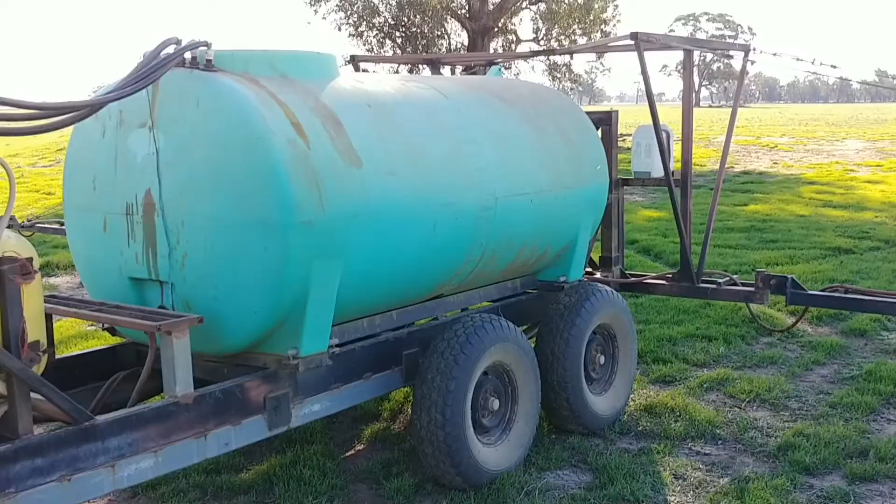It's got a 3,000 litre tank, 18 metre boom, 17.5, 18 metres.

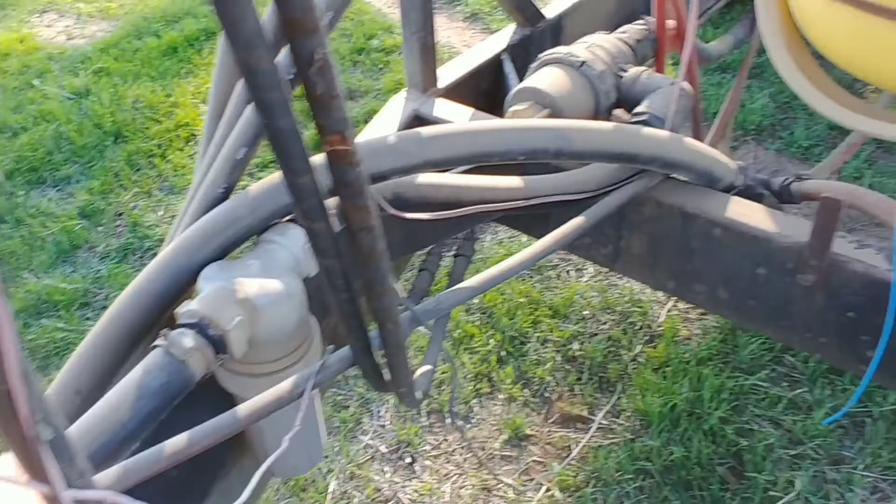Start from the pump, I guess. It's got this diaphragm pump, on the PTO. Water in, a couple of filters, water comes in. This is some type of pressure relief return line back to the tank.

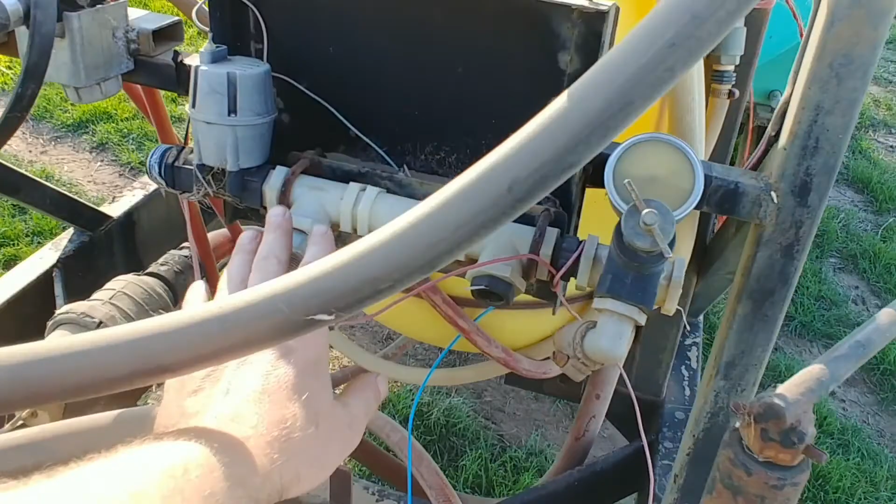The old control system was here, which we're not using anymore. I'll get to the new one in a minute. It's a bit past it, out in the weather for a long time. I think this is the old foam tank or something, which we're not using.

We use GPS these days. The tank itself is pretty good. Lid works, which is nice. 3,000 litres, looked really strong.

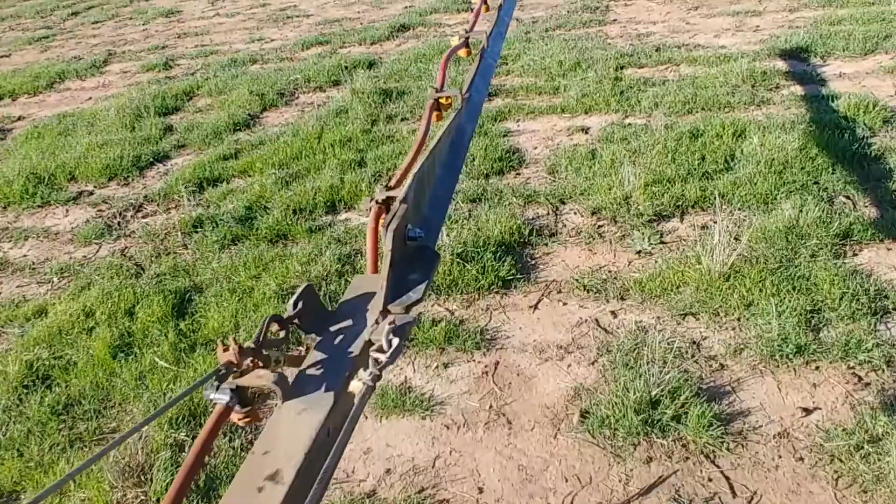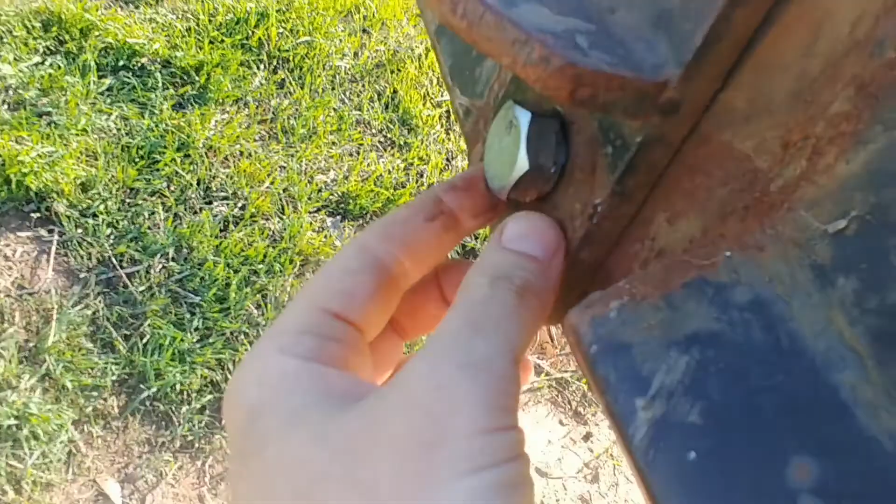The boom just folds out. Gotta do this bolt up, because if you don't do it up, you'll lose it, and then this will flop around, and then this bolt will shear off, and you'll lose this part of the boom. That happened to me this morning. But got this bolt in here now, done it real tight. So hopefully that doesn't happen again.

So it's got 3 sections. That long section, small section in the back, and another long section here. This boom's the same.

It's using the TeeJet nozzles, LA ones. These wheels are apparently pretty good, they seem good. Haven't failed on me yet, which is nice.

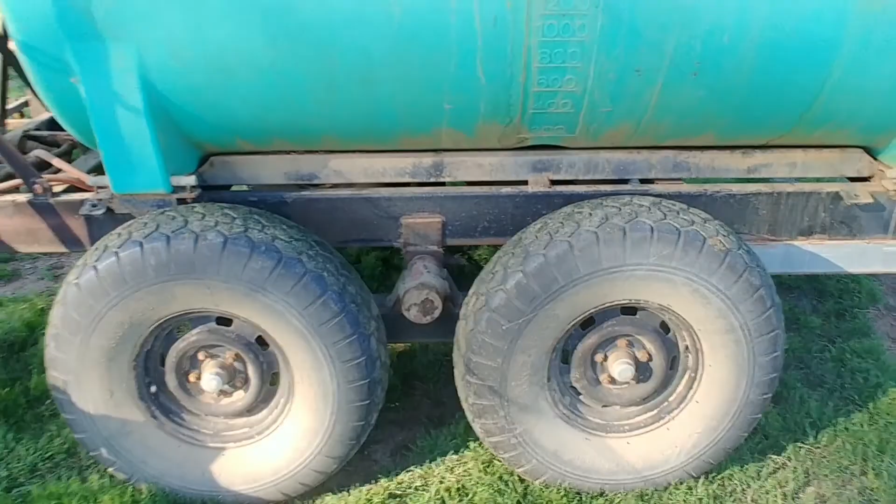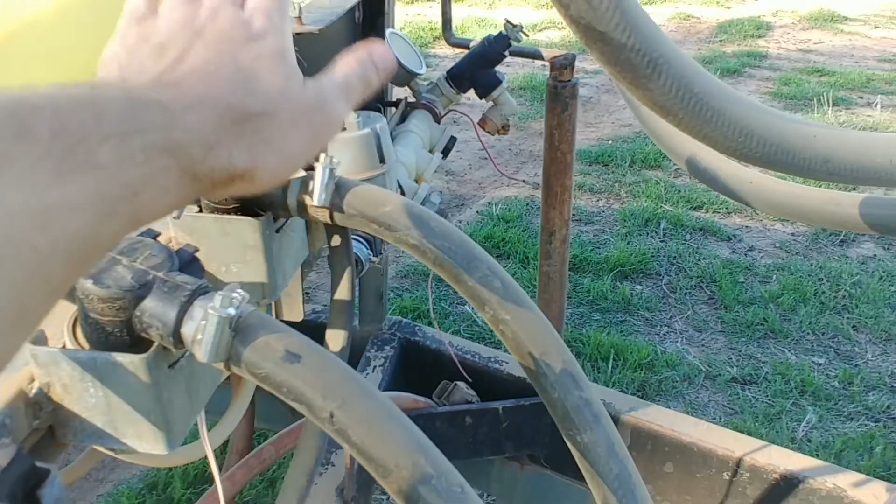So the main thing we did, we've got these boom lines, 3 boom lines coming out of the control system. And we put filters on these so we can clean these filters, get any sand out.

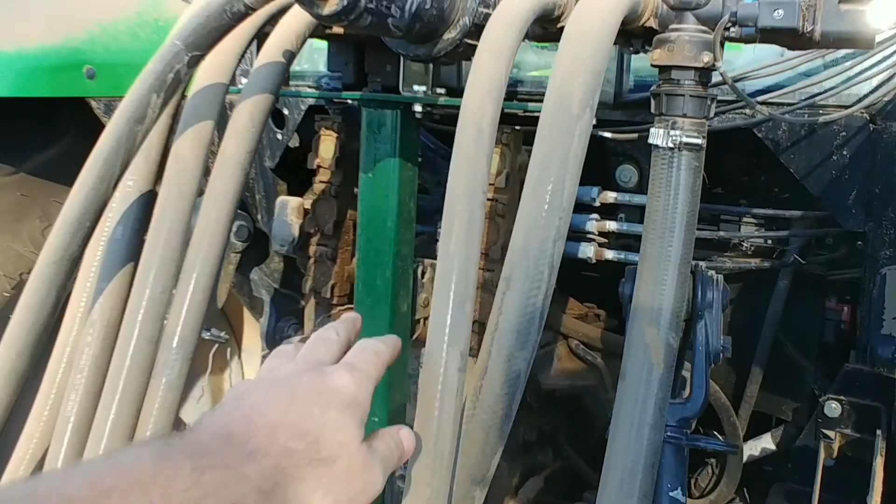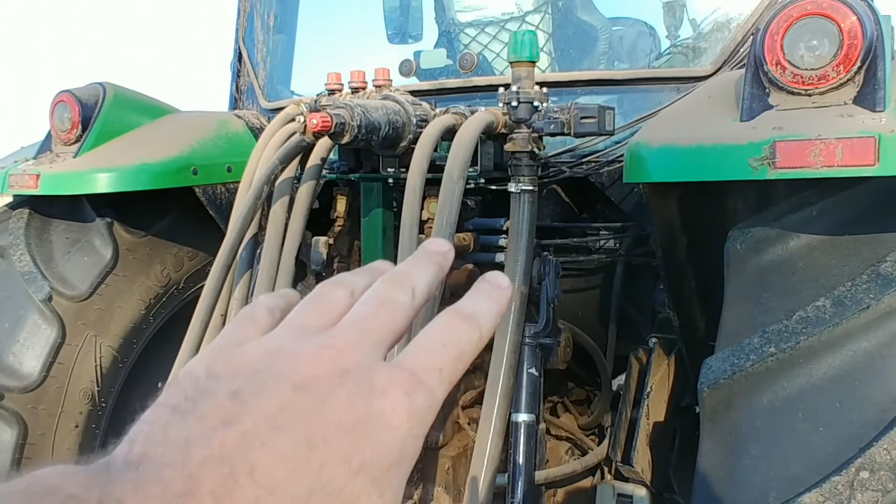So the main upgrade we did to this spray cart is we added a new control system. I've mounted it up here on the back of the tractor, which is probably not the best idea. You probably should have it down here, and all your hoses can be shorter, especially since it's electronically controlled. But maybe that'll be something we change in the future. Got all these hoses sort of hanging, but it does work all right up here.

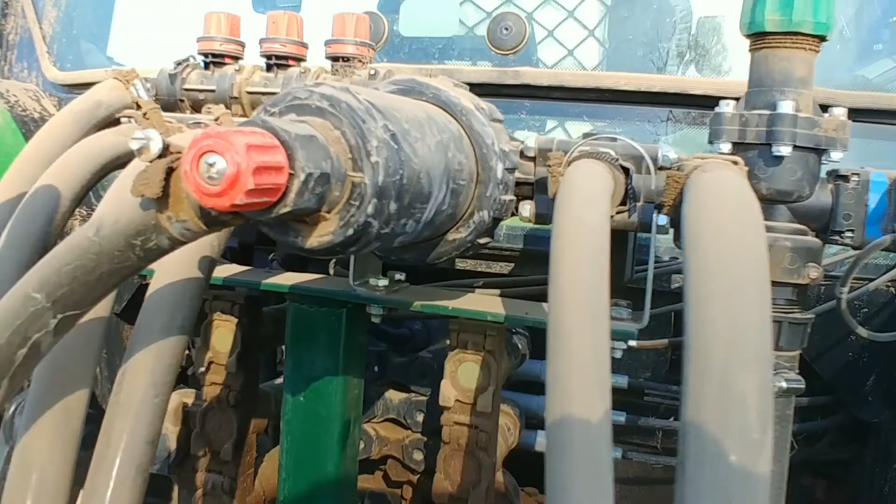I wanted it up here so I could see the pressure gauge, and if I had to, I could mess with these settings, or this one. But it seems that, after using it, you may as well mount it down here.

So this is the main water in here from the pump. Main water comes in. This is the maximum pressure valve, return line. Proportional valve with the return, filter with the return, the 3 booms, and the return. Extra pressure from the booms, I guess.

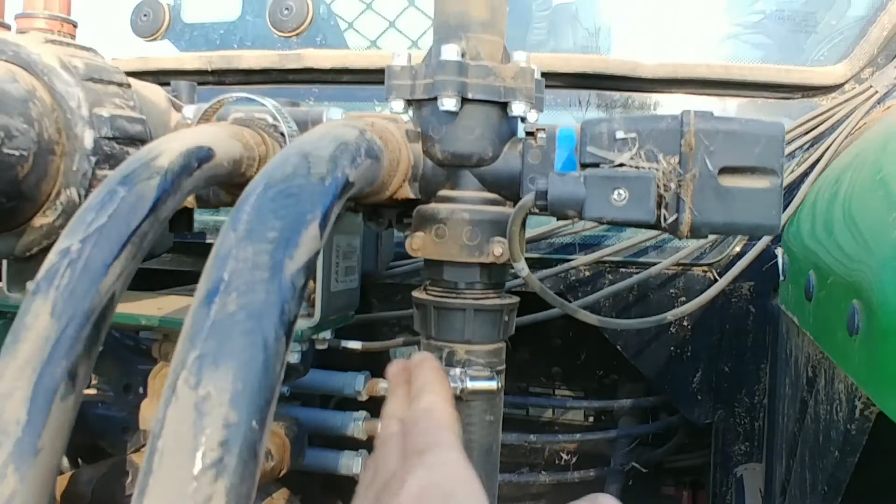So it's got this main gear motor. If you turn this on, it lets water through the system. If you turn it off, it just all recirculates back through this valve here. And then depending on where this is set, any extra pressure comes back through here too, which is nice.

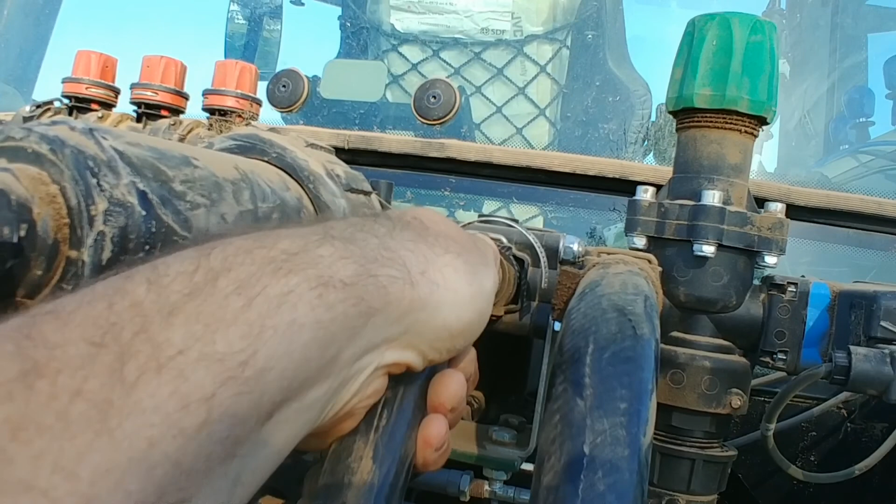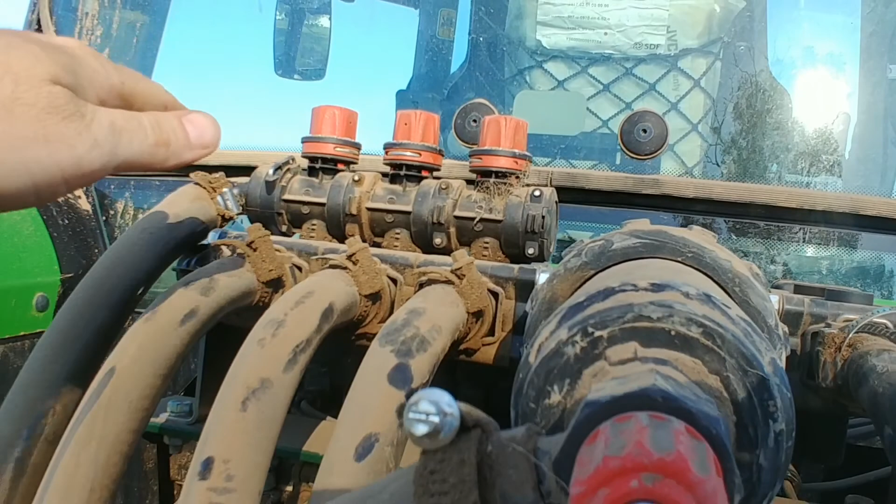And then you set your actual pressure with the proportional valve, and then you just got to set these cocks so all the pressure, depending on whether each section is off or on, 1, 2, 3, it equalizes the pressure. So you can turn a section off and everything's spraying at the same rate.

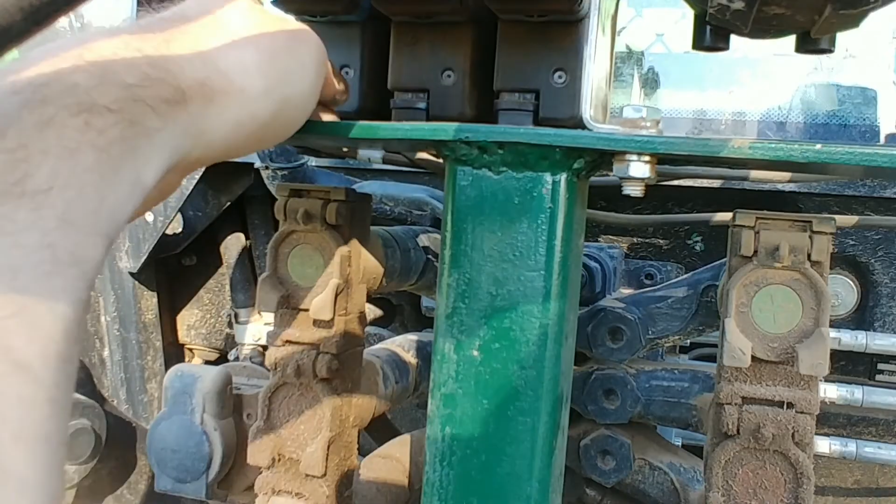And this is an ARAG system. Got it from sprayshop.com.au, 1,900 bucks. And you can see there's electronic control. I don't think they're solenoid, I think it's some sort of mechanical control, I'm not entirely sure.

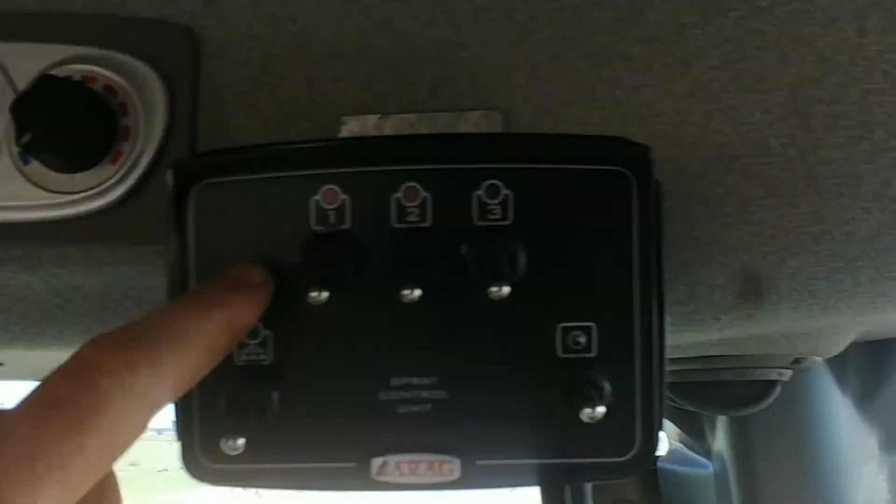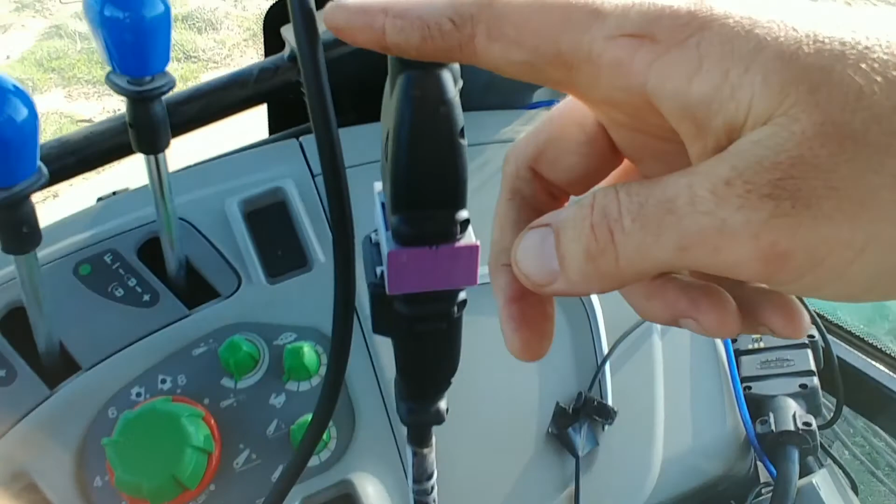But that goes up into the control box, which I'll show you. Now this is a series 4669 ARAG control box, which you just plug into power. We just got a 12 volt socket down here, and then it's got all 5 of those mechanical valves or whatever come out through this control line.

So from up here I can see the pressure gauge, which is nice. I can feel all the valves moving. But as I said, we'll probably move it down there at some point.

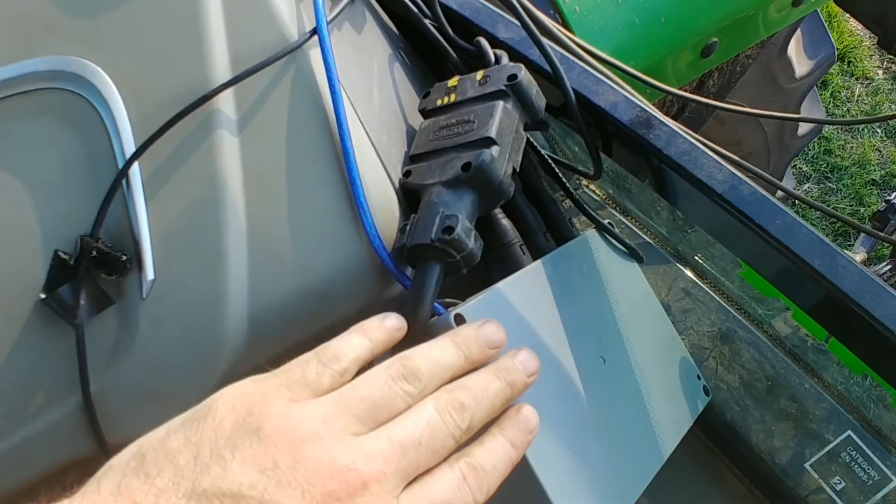Okay, so what I've done here is I've spliced into this control line, and I've got all 3 of the section valves going into a box which has a little Arduino and a relay, or 4-channel relay, using 3 of them. And that's controlled by, connected through USB back to this computer, which is running AgOpenGPS. And it just controls those relays for you, which is sweet.

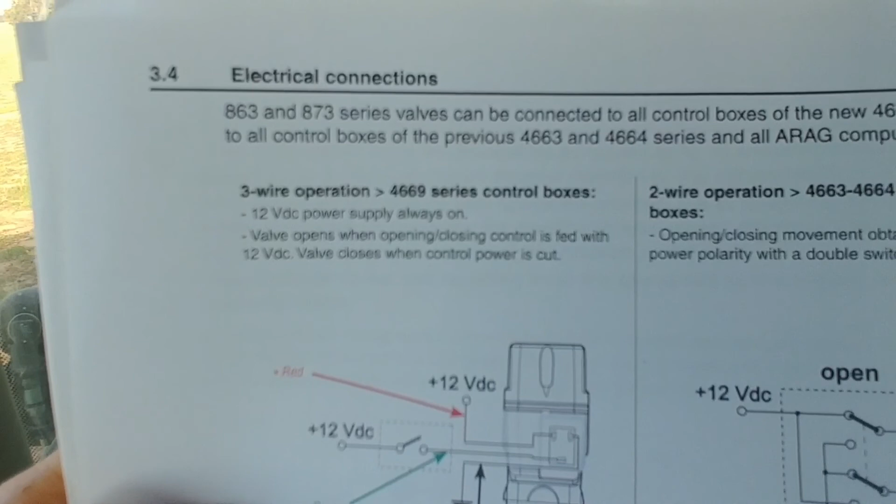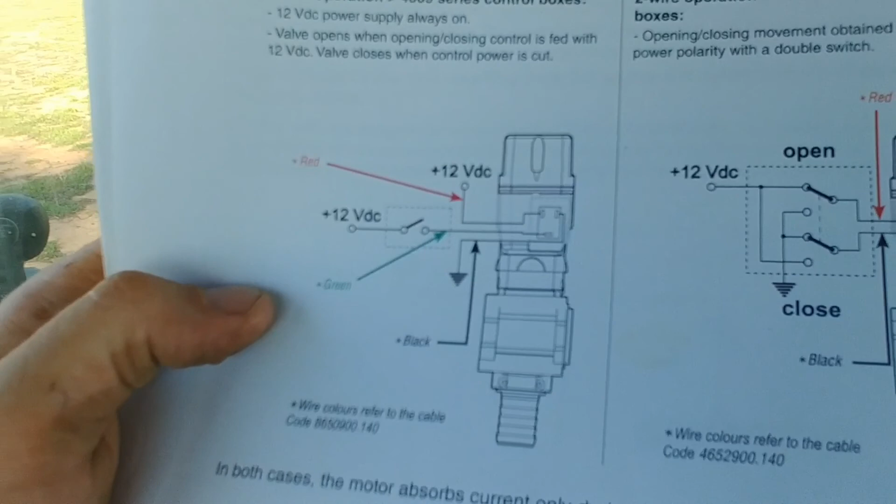And it's quite good because if you look at the book for this 4669 series control box, it says here, valve opens when opening, closing control is fed with 12 volt. Valve closes when power is cut. So for each electric valve, there's a positive signal in green and a black, so earth or whatever. And all you have to do is cut the power to the green, to the signal one. So I wired through the signal through to this box to a normally closed relay.

So that works really well.

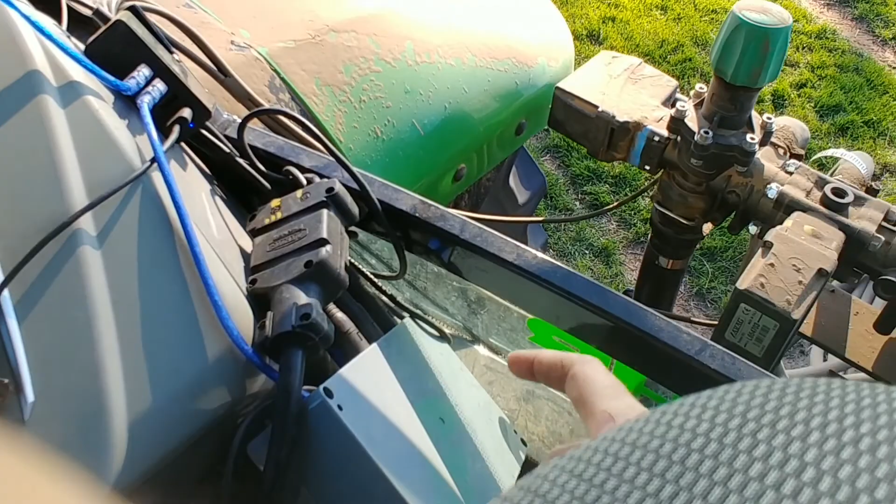Yeah, so you can still control all the valves with 1, 2, 3. Trust me, it works. It'll be closed because of that relay. But then, even if these are on, the control box will close the relay when the computer tells it.

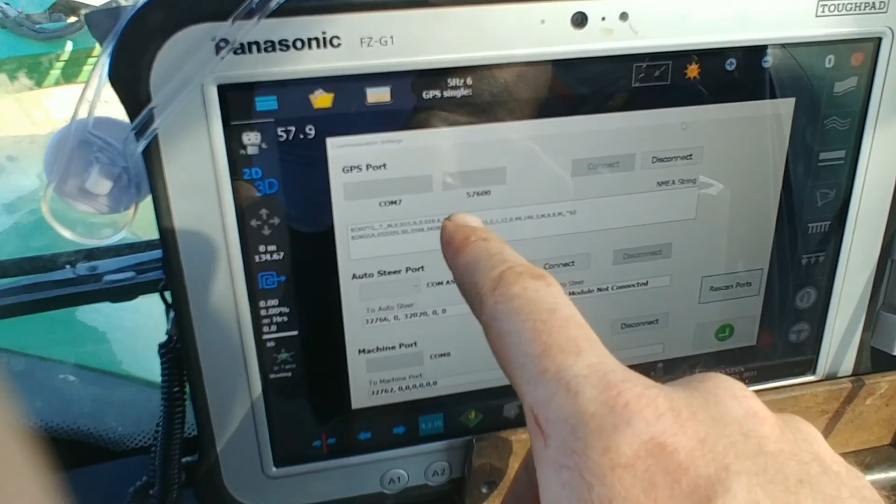So that works really nice. Then we've got AgOpenGPS here. Oh, now everything's turning on. And we can see down here, serial port, so we've got GPS coming through here, and the machine port is that relay box.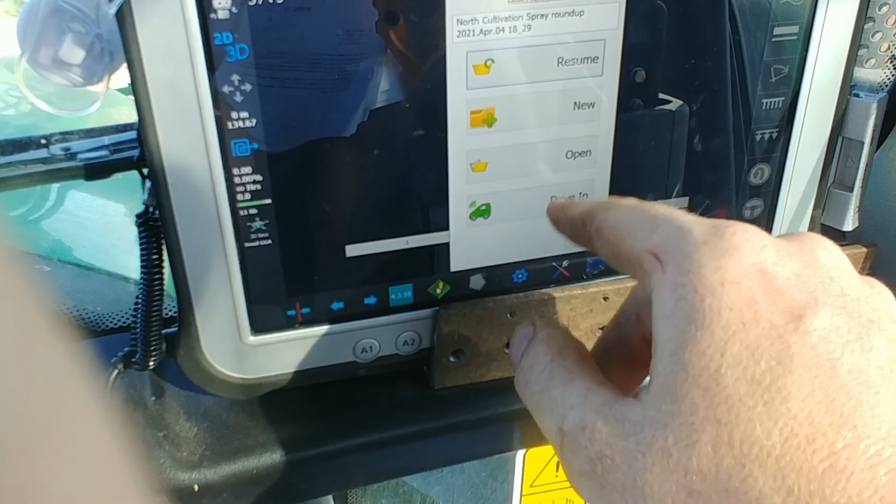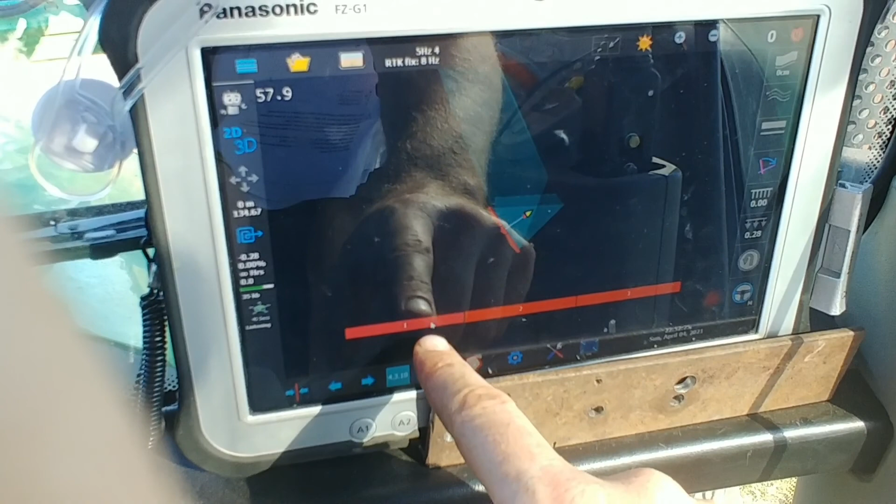So we can just say, open a test field. You can hear, so yeah, see, we can control the relays with this. So if I turn this on, but I turn it off here, that'll override it. So it's cool, you have to have all these on, but then the computer controls the relays.

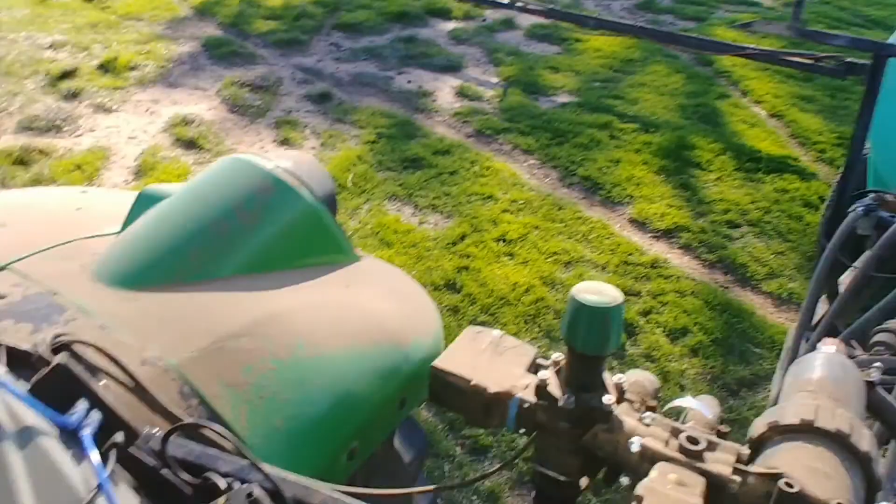Okay, just gonna give a quick demo of how to use AgOpenGPS. First thing you want to do is turn on the pump, so turn the PTO on. See the shaft is spinning down there.

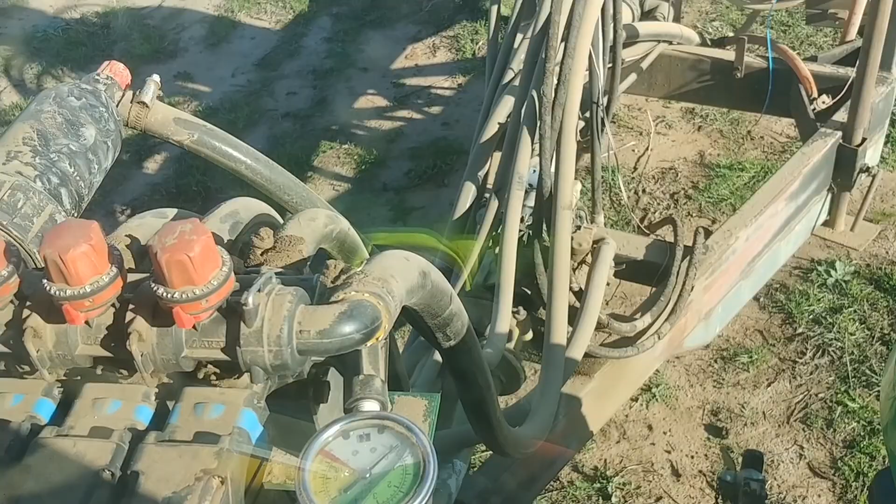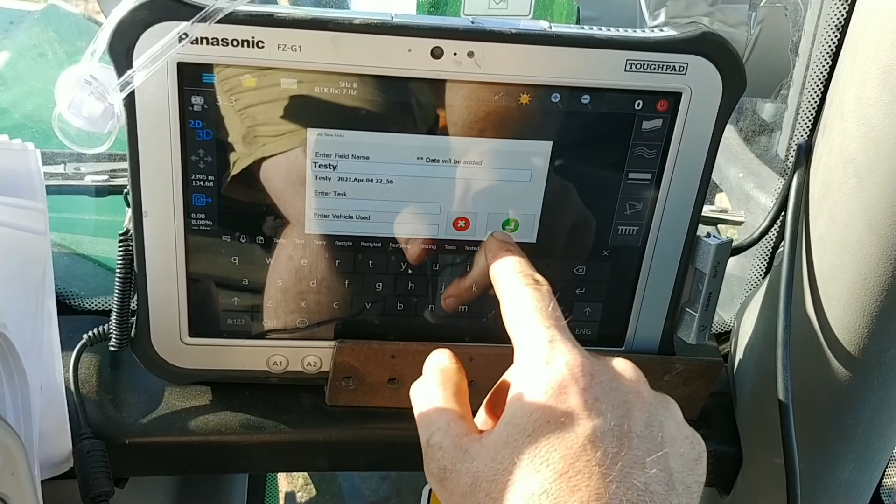We set up the computer, we'll say new, put a field in. Testy. Okay, first thing you want to do is make a boundary then, and you can see your 8.66 is, you know, half of your tool width over to the side.

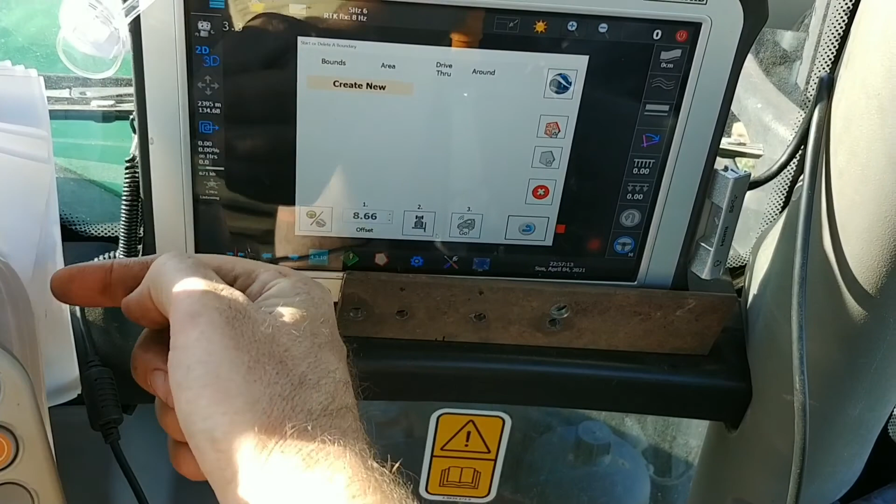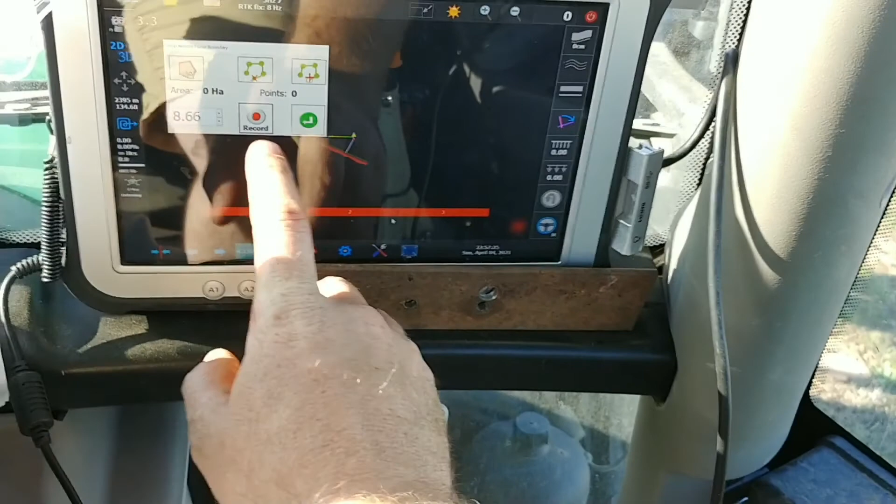So you press create new, and you want to make a boundary on the left hand side, for example, and you just press go, and then you can just press record now. And normally you would turn on that one when you're ready to go. But anyway, we've got our pump going, so now we've got to turn our control box on.

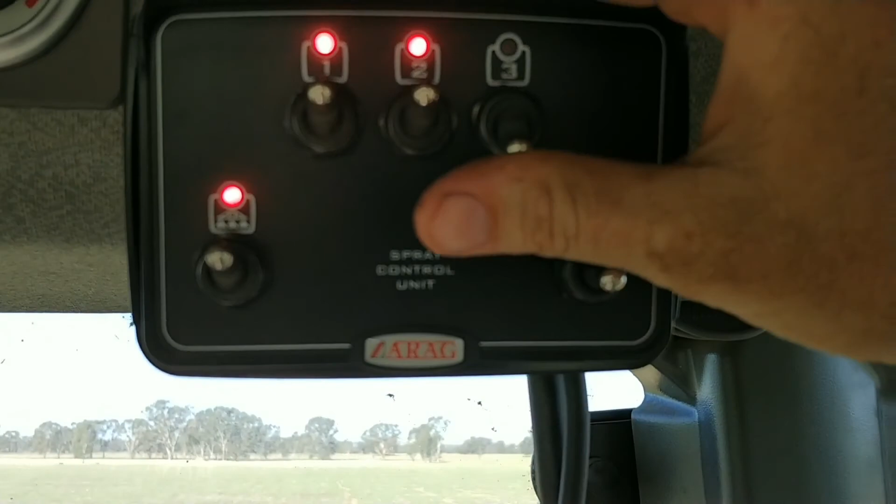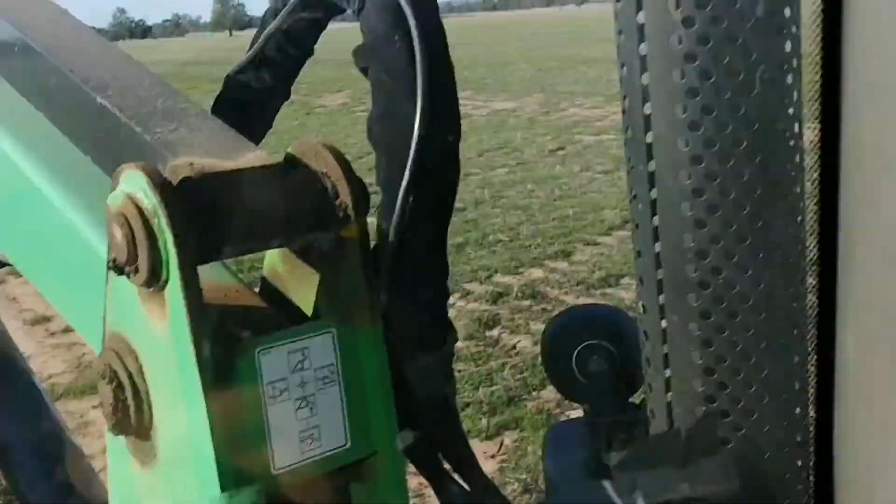And all our sections on the control box. And if I were to press, say, section 3, turn on here, third section will start spraying. So normally when you first go around the paddock, you'd actually put the automatic one on, and it'll turn them all on, and they'll all be spraying.

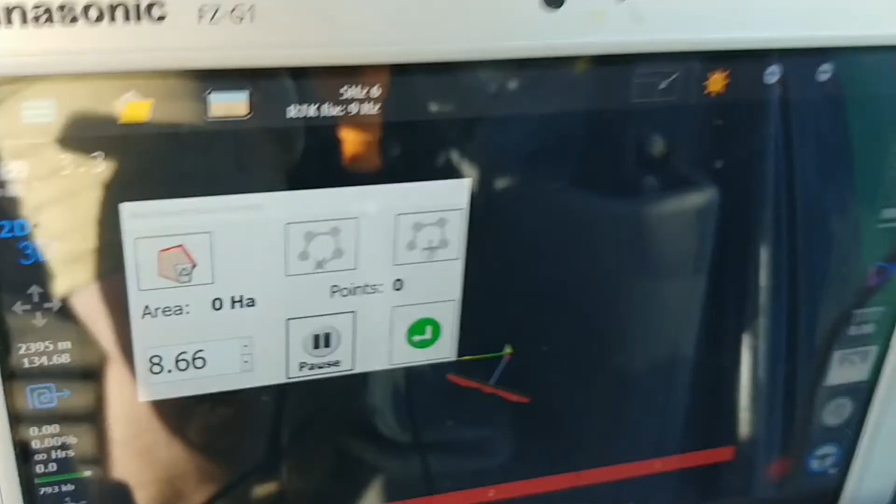But this is just an example, so I won't actually press that button, I'll just show you how to create a boundary and an AB line. So anyway, we hit record, we'll get our pump up to the RPM we want. We've got our control box on. We check the pressure, make sure we got the right pressure.

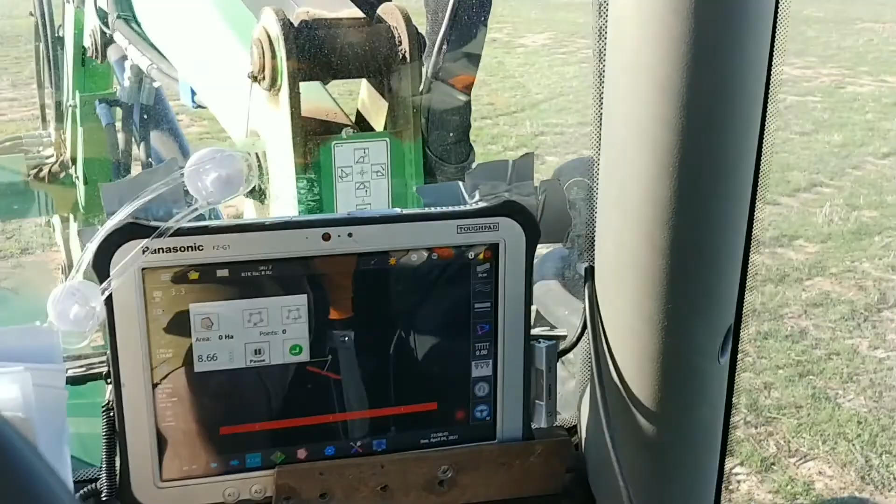Normally we would turn on the automatic section control, so that'll turn off if you start to overlap and stuff. That's that green one down there. But anyway, now we can just go. We usually just hit that button, all the spray will start, and then we go.

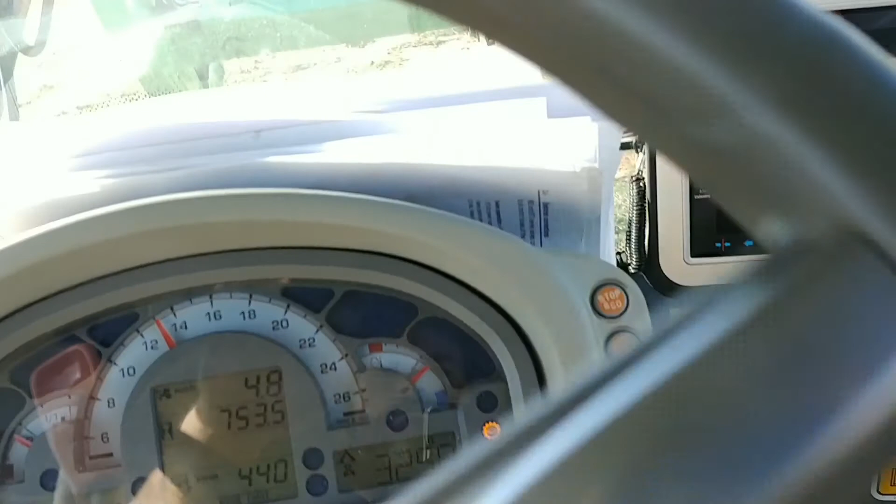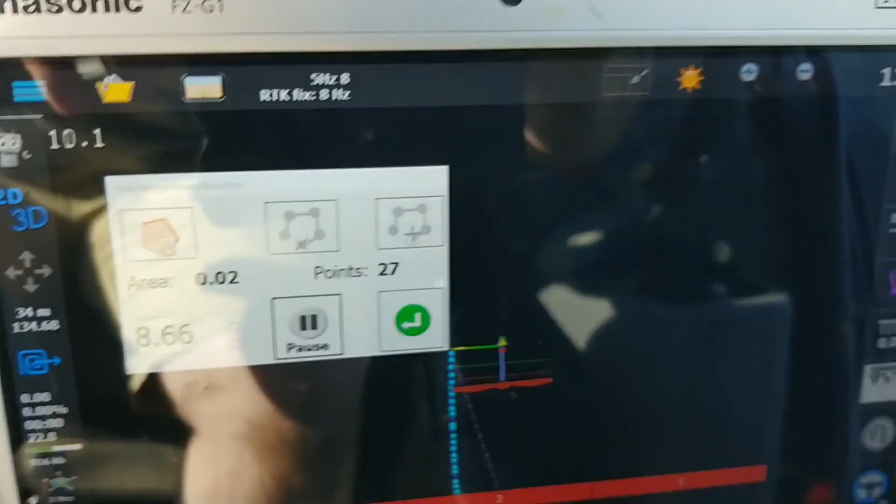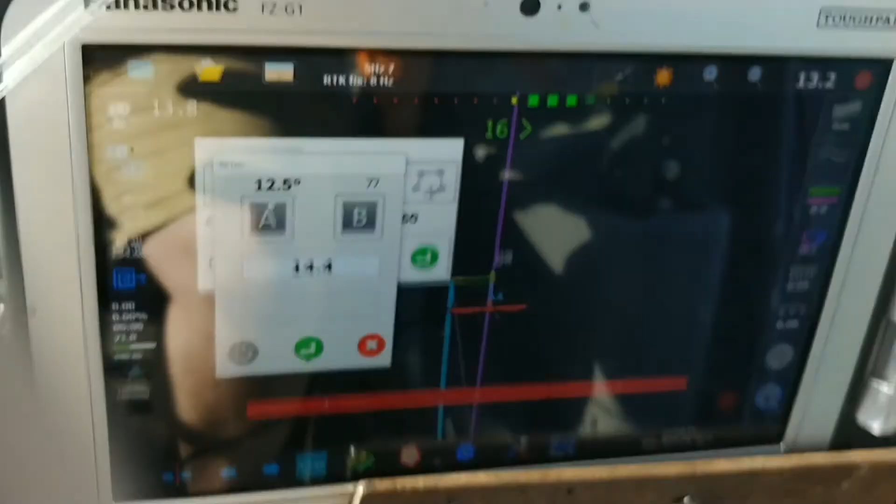And you can see in the program it's creating a boundary. And now normally we'd be going along a fence line or something. So as we're going, you just press this line button, and this will make a new AB line for you. You just press the plus, press A, and the boundary's getting made in the background at the same time.

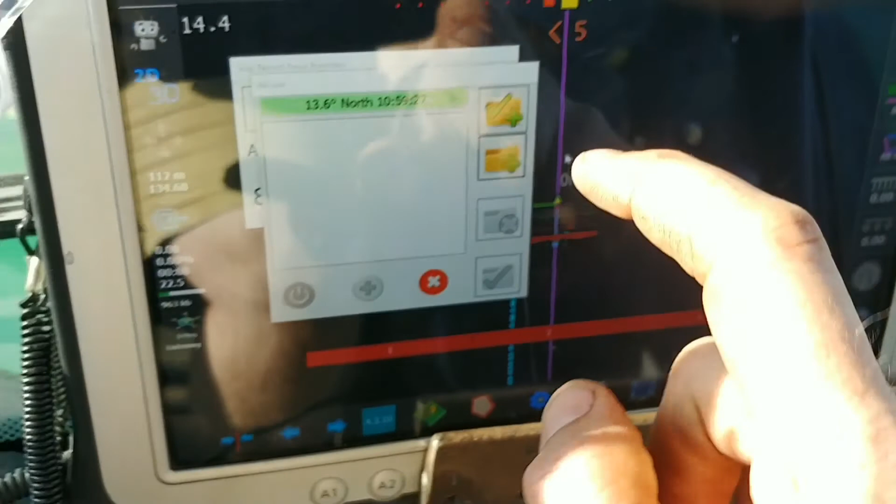So normally we'll be going along the fence line, and once you're happy with your AB line, you can just press B, hit enter, and then press this tick here, and you see we've got a pinky purple AB line sitting there. Yeah, and then we can continue to make our boundary. So that's pretty. Okay, so I just completed the job.

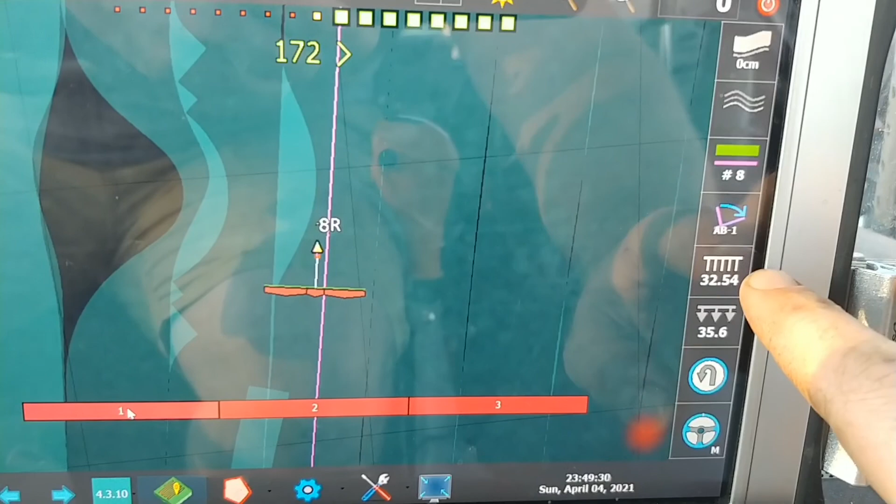You can see my boundary area was 32.5 hectares and my coverage was 35.6. So it's a bit of overspray, mainly due to this control box turning off. And the reason that happens is it's just got a really crappy 12-volt connector, and I just got to put a better one on. This one just sort of jumps out of the socket when I hit a bump, so that's really annoying.

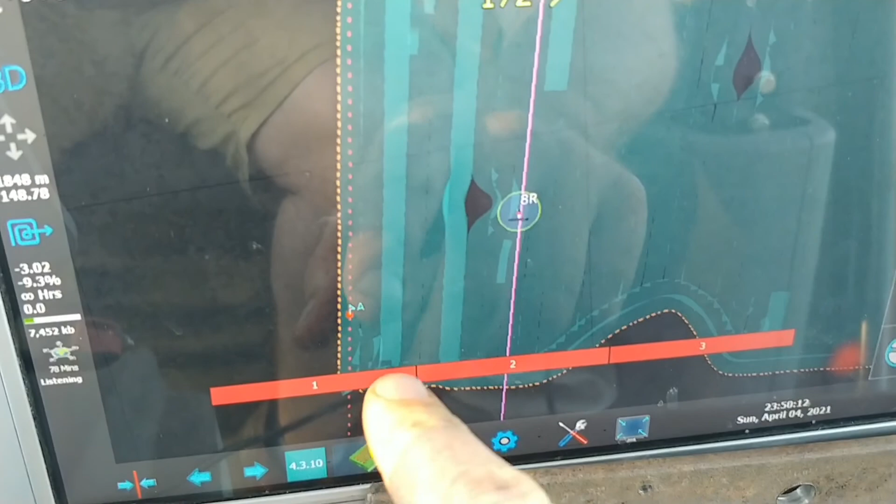If I zoom out, you can see all the overspray I got. See, sometimes if this control box was off, I wouldn't know where, I can come back later and just spray the green stuff, but I just wanted to make sure I got it all done. See, the control box would be off at some point, so I just had to go back and redo these few runs. And yeah, so there's a fair bit of overspray there.

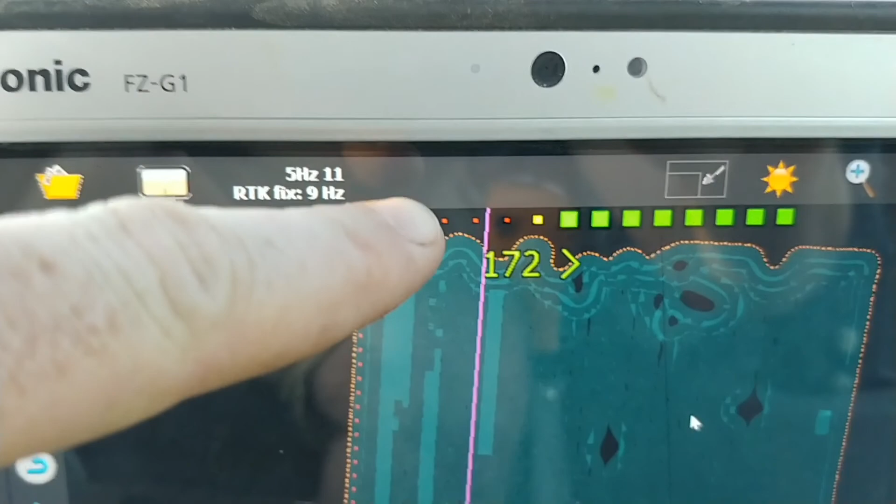A couple of things I wanted to mention about this program was there's a new version out, Beta 5, which I haven't tried in anger yet, but I noticed it puts the area and the amount done up here, which is nice, instead of having it down here. Might be a bit more obvious for people. And what else did I notice that was cool? Oh yeah, in this 4.3, you can see the version down here, 4.3.

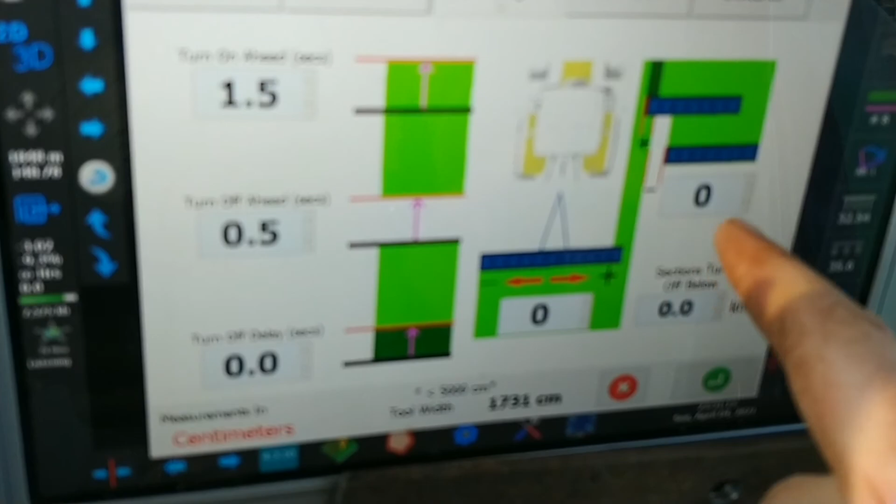Can't see, I don't think there's anywhere for, there is overlap here. It's just not written in the menu. Right, so that makes sense. I could put overlap in there. It's written in the menu of the new one, so yeah.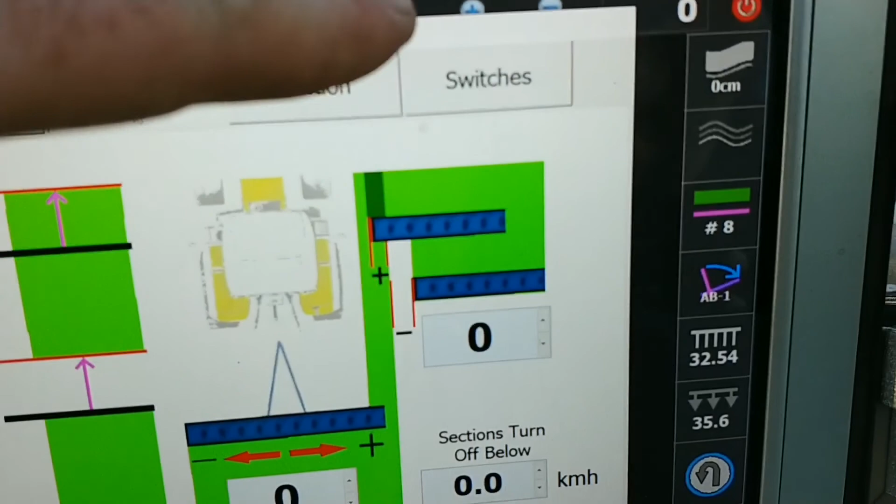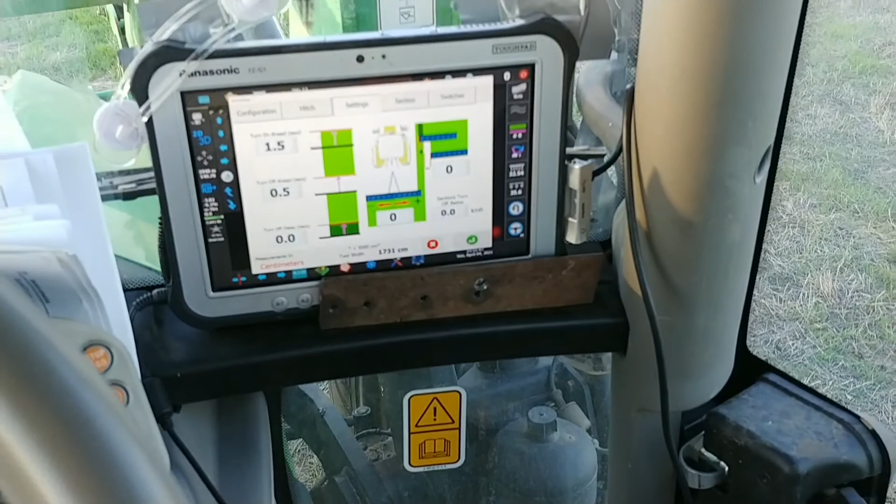What I have done for this is I made my sections a little bit shorter than they actually are, so I made sure I had enough overlap. But looks like that setting is there, so you can probably put 30 centimeters of overlap in there or something, but I'll see how this runs, see how good the grass kill is.

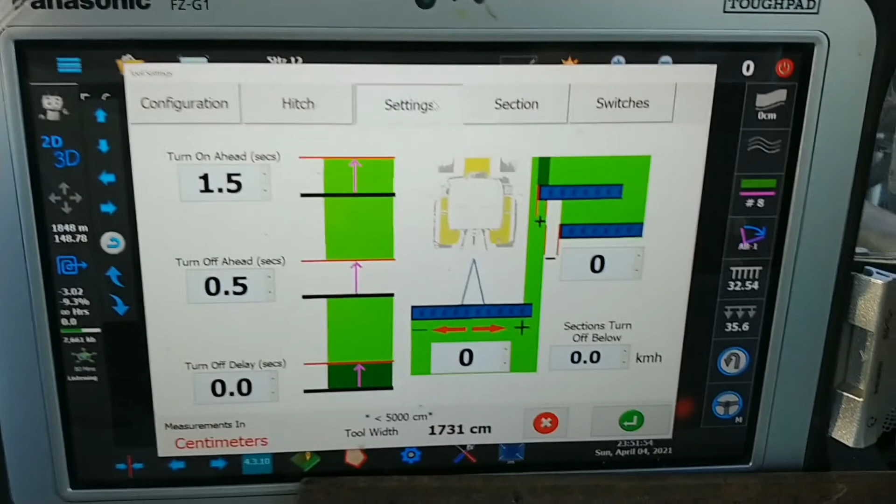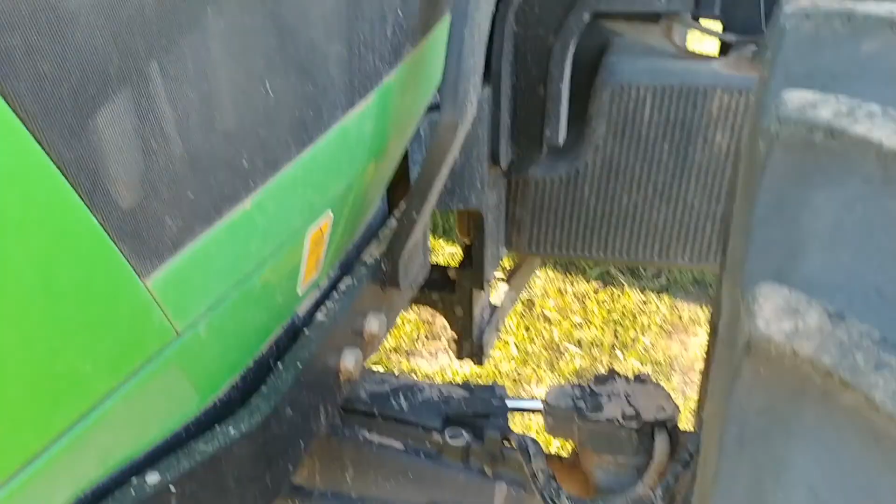You could probably tell that I'm not really using AgOpenGPS to its full capability. I'm not using auto steer or anything like that.

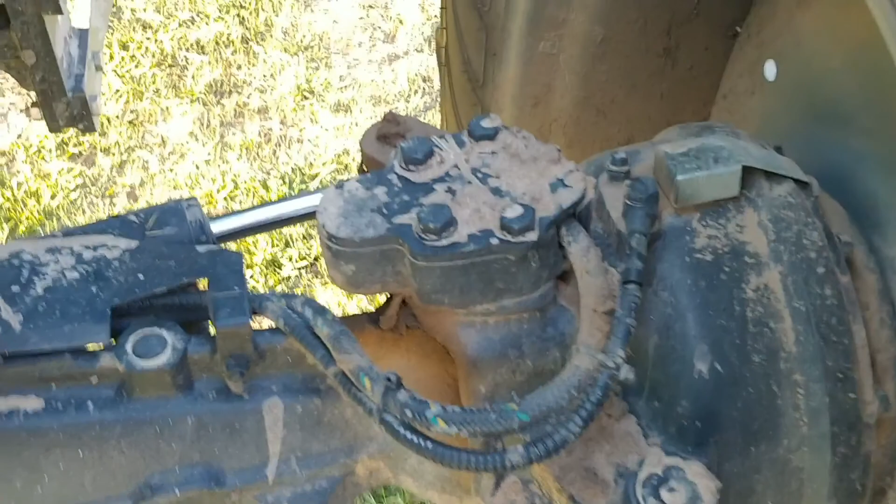So if anyone out there knows if that's a wheel angle sensor, I got these. I don't know what this one is. It might have something to do with the brakes, but this one just might have like a wheel, unless it's something to do with four-wheel drive. I'm not sure, but you never know. This tractor may just have a wheel angle sensor from factory. That's what it is.

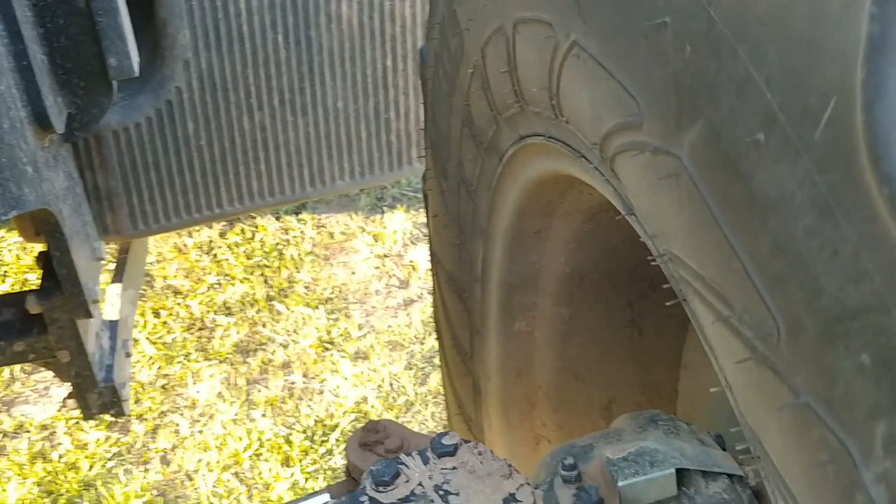And if that is, then can I access it? Do I have to get it through to CAN bus? Can AgOpenGPS read it? Let me know in the comments. Thank you.

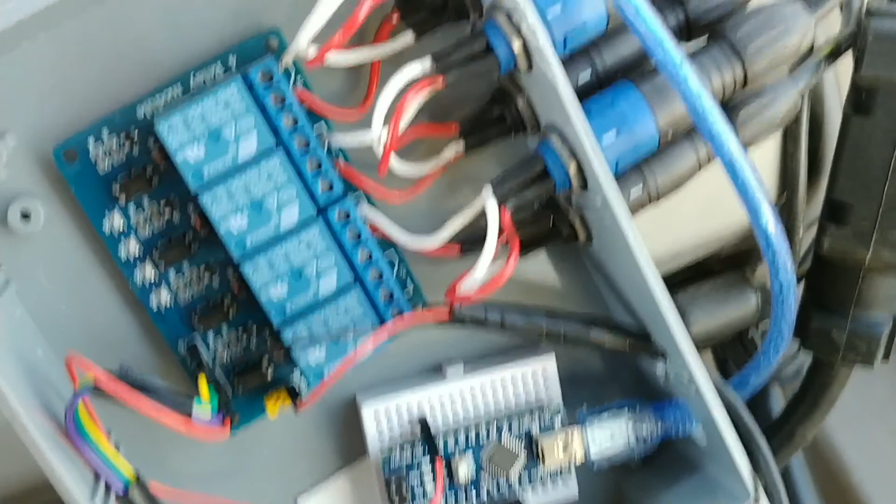Okay, here's the control box. All it's got is an Arduino Nano. It's $5 or $10, I can't even remember. And then a relay board, optically isolated relay. I can't remember, maybe 10 or 20. I'm not sure. So there's a single USB port on the computer running AgOpenGPS.

Comes to here. One of these goes and powers the Arduino, and that's connected through the USB back to the computer. The other, out of this USB hub, actually powers the relay. So I could be having, see that one there. So this relay is isolated electrically from here, although it is sort of still getting the power from the one USB port. So you probably should be externally providing power to this.

I guess to be safe. But this works anyway. And then the other USB port goes to GPS, and the GPS goes up on the roof. So yeah, basically everything is through one USB back to the computer, which is over there.

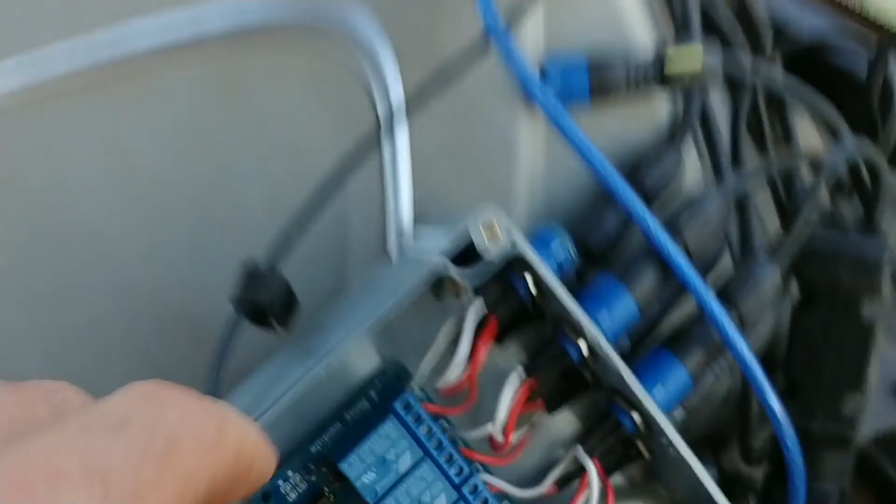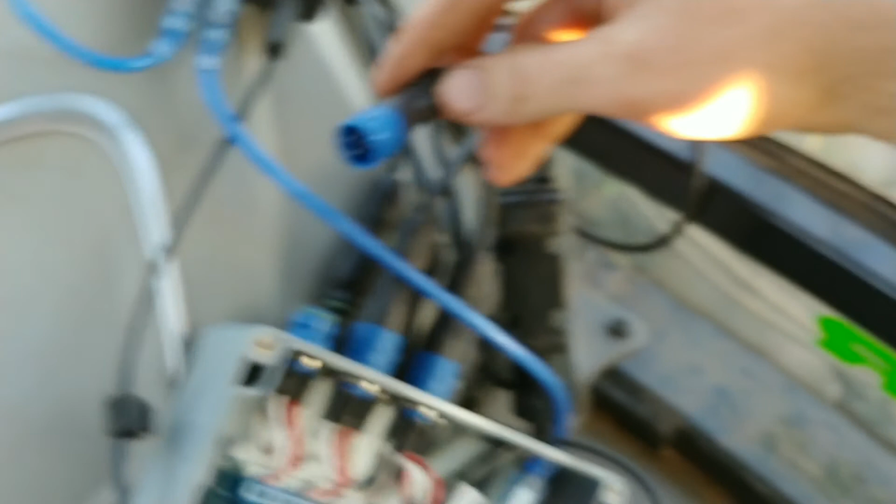And so the wiring for these sections, so section 1, 2, and 3, there's a separate cable for each one. So this would be like cable 1, and this would normally come out of here and go directly to the mechanical valve there. However, I've just made it so the cable comes in. Here's 1, 2, and 3. So 1 comes in, the power and ground goes straight back out to the out cable, but the signal wire goes through the normally closed on the relay.

And so I put these connectors on, so if there was ever a problem with this box, I could just connect these like this.

There goes Ross. I'll have a chat to him in a second.

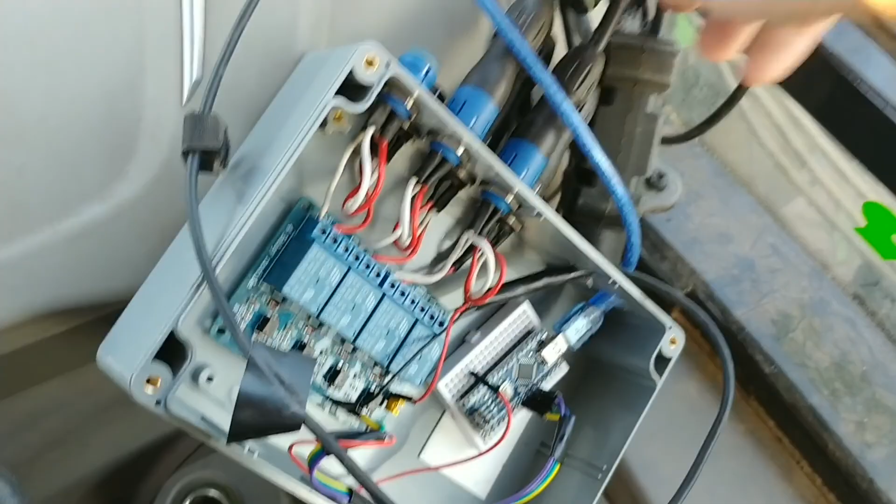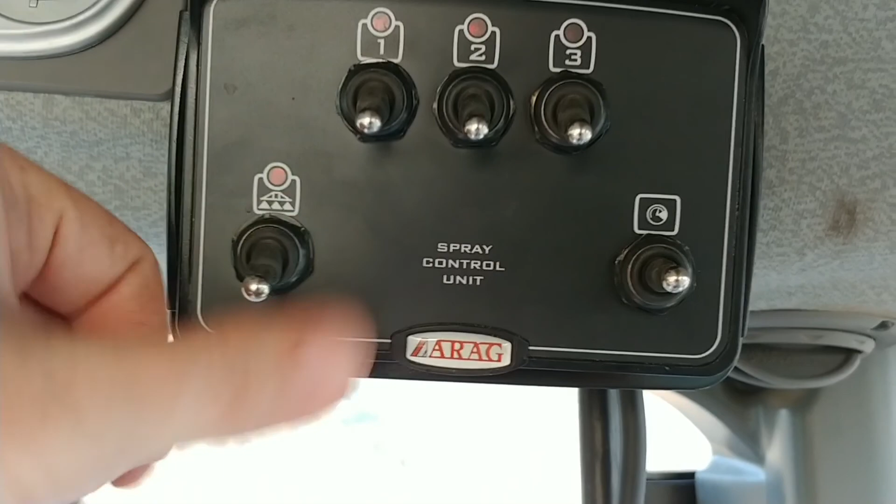So I can just totally disconnect this box easily, and just rely on this. If there was ever any problem with the Arduino, yeah, this would just still work. I'll just have to turn everything off or turn the sections off with the box, which is how I guess a lot of people would do it.

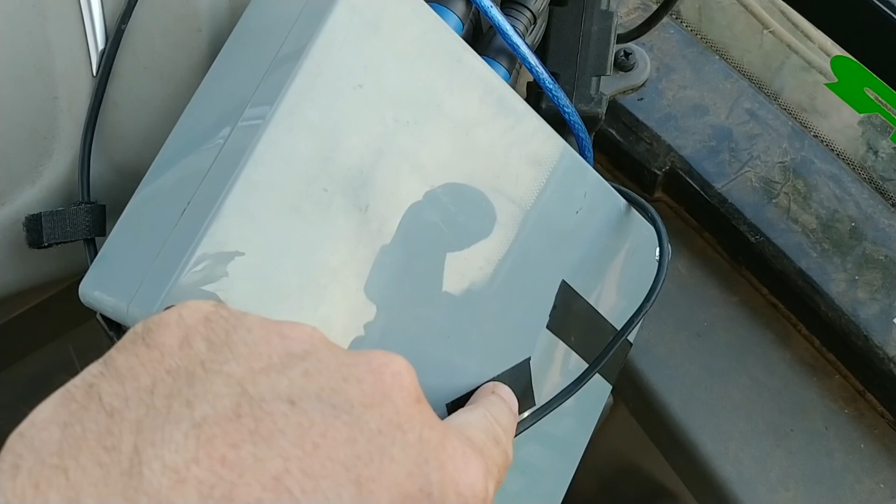While I'm here, I should mention setting this Arduino up is really easy. When you download AgOpenGPS, there's a folder with the code you have to put on the Arduino, and you just send it, you plug the USB into the computer, and you send it to the Arduino. And I didn't even have to edit anything in that code.

So once I did that, then the Arduino can connect to AgOpenGPS. You just have to have everything plugged into the right inputs and outputs. So the outputs from the Arduino to the inputs on the relay, I think it was 5, 6, and 7, or 4, 5, and 6, and then 1, 2, 3. Yeah, it was pretty easy. No coding.